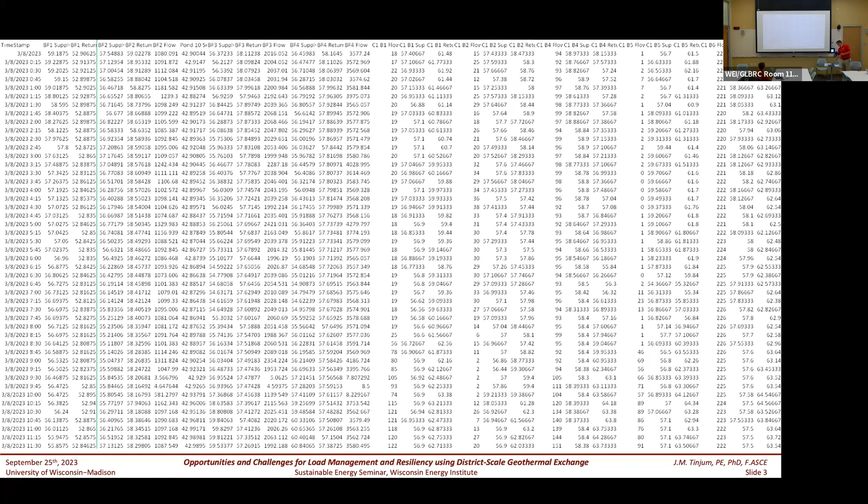So this is a little bit of a screenshot from energy data that I get daily from Epic Systems. Their flows to their different bore fields, through their heat pumps, their chillers, their energy usage. Epic Systems is a very gracious research partner, allowing myself and my students access to this information so we can poke and probe and look at it and calculate coefficients of performance and payback and environmental assessment.

Because when you can measure what you are speaking about and express it in numbers, you know something about it. That's Lord Kelvin. And I know sometimes our political system can measure things in different ways, but we as engineers and scientists are really expressing it in numbers, having hypotheses, testing those hypotheses, trying to remove the bias out of it and answering those questions. Just earlier this year, Madison City Council was looking for new rules for big buildings. So why did I put this here? So if we don't measure where we are in our energy consumption in our big buildings, how do we know where to go to?

So lots of pushback there from businesses and developers and similar, but one of those things that is gonna go to a quote from me in an article that was used to promote this. So this is Tinjum. The most logical application for geothermal heat exchange is in district heating and cooling systems, serving campuses, industrial parks, and neighborhoods. For example, a city could require or incentivize developers to put well fields into new subdivisions, allowing homeowners to tap into those energy savings.

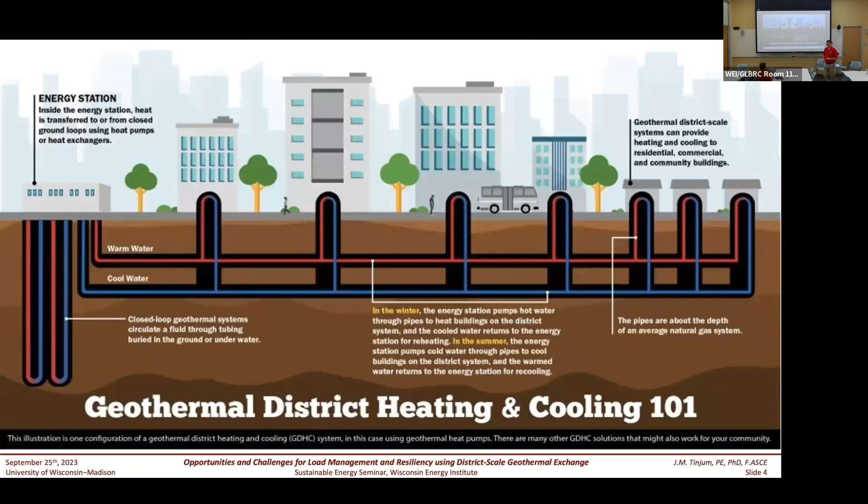So instead of every one of these individuals investing in their own geothermal exchange system, we share that community resource and we put the heat pumps and the chillers in the individual buildings, but we're using a common high efficiency geothermal exchange field. Maybe that geothermal exchange field is in a city park with soccer fields on top of it, or a common area, whatever the case may be, where we have that space to put these large systems that we're going to be talking about.

All right, so let's talk about scale. I like geothermal in that it scales very well, very unlike wind energy that I've also been working with for a decade plus. But wind energy just does not scale well to the residential scale. You're not going to have wind at your house unless you're just an enthusiast and want to lose money. Wind energy works best at large utility scale, 100 megawatt and above. It's where it has its efficiencies. Not so in geothermal. Well, yes, there's still efficiencies of scale, but it's not as pronounced.

So let's look at residential scale first. Typically, your capacity is 2 to 8 tons, less than 10 geothermal exchange wells. Cost typically well under $50,000, and say about $75 plus per meter of installed geothermal exchange well, with a coefficient of performance of 4 to 6. So first, let me define coefficient of performance. It means that for every 1 unit of electrical energy that I put into the system, I get 4 to 6 units of heat or cooling energy out of it. So yes, geothermal exchange uses electricity, and electricity's got to be generated somewhere, but you get 4 to 6 units of energy out of it.

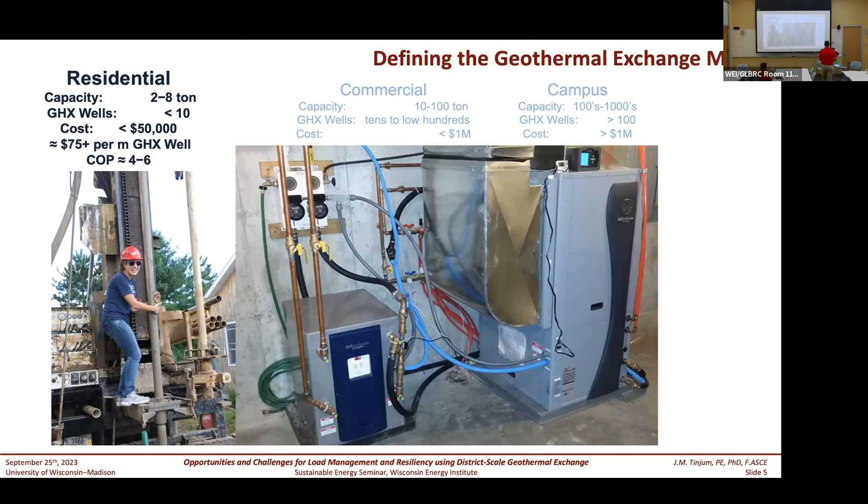So let's just compare a coefficient of performance of 5 to your natural gas furnace. The highest efficiency possible for your natural gas furnace is 1. You burn 1 unit of chemical energy and that goes into heat. The highest possible you can get out of something that's burning something is 1. So we're multiple times more efficient than burning a fossil fuel. On the cooling side, we're about twice as efficient as a traditional air conditioning system, whether it's cooling towers or some other type of system. That's going to matter later in how we think about this for energy resiliency.

All right, so let's start with that residential, and this is the heating cycle. My general rule of thumb in this area is about 60 to 70 meter deep wells. Every 60 to 70 meter deep well will give you about 1 ton of capacity. A typical residence in Madison has probably a 3 or 4 ton system. So a typical residence might need 3 or 4 60 to 70 meter deep wells to provide the heating and cooling in their house. We are looking for a delta of about 3 to 5 degrees Celsius.

So what that means is in the winter, I'm putting cooler fluid into the ground, and the earth is being used as a thermal battery to warm up the water in that pipe and bring it back about 3 to 5 degrees warmer than when I put it in. That's our energy exchange. So that's our power: moving mass, which is our water, times the C sub P, or the storage term of water, times T out minus T in. That's our thermal power. That's actually the definition for thermal power.

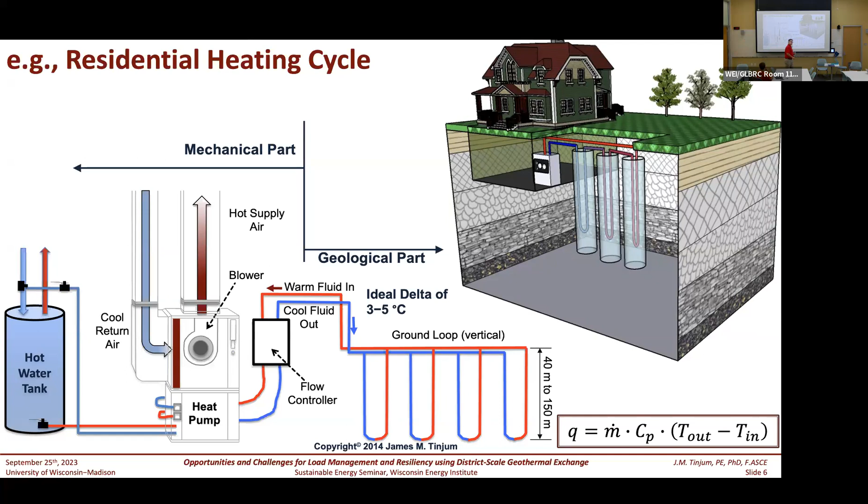Hey, this is not rocket science. No, we don't have to send somebody to the moon. This is doable, and we've been doing this. All right? This is some mechanical engineering, some geoengineering, but very, very doable, and has some limitations. We'll talk about that. But now let's go to commercial scale.

Say 10 to 100 tons of capacity. Maybe we got tens to low hundreds of geothermal exchange wells. Where our scale is going to get us is here. Usually we're going to get a better drilling price from those contractors because they're there for days and days drilling. So this is where the scale matters: the geothermal drillers can give you the best prices because they don't have to mobilize here, and the next day they're over here, and the next day they're over here.

So this is an example of the system at Badger Rock Charter School here in Madison, just south of the Beltline. So Badger Rock Community School, they have geothermal heat exchange at their system, and they have 72 wells, 300 foot deep, and that is used for Badger Rock as an example of a commercial or building scale on geothermal exchange. A little bit bigger pumps for that system.

So you see the, can't count all of them, looks like 4 pumps, but you always have at least 1 pump and the second pump for backup. So then the scale also is we can more efficiently pump our loop. We get higher efficiencies out of bigger pumps and variable speed pumps and similar. So that's the commercial scale.

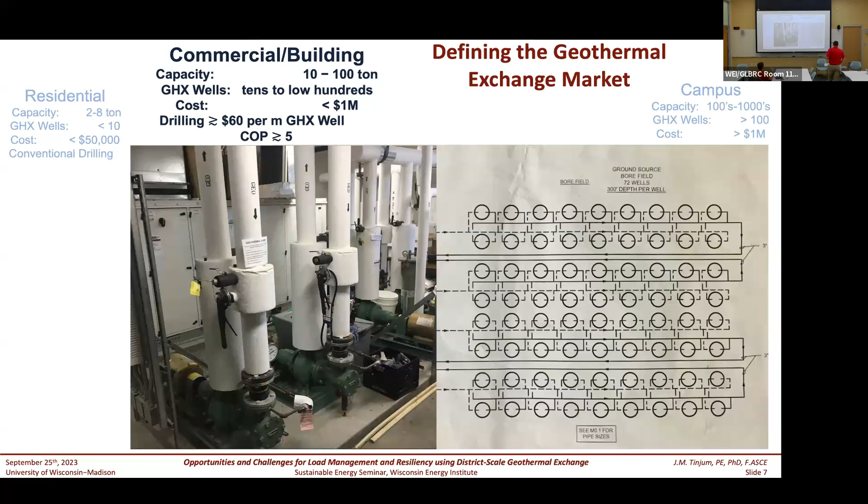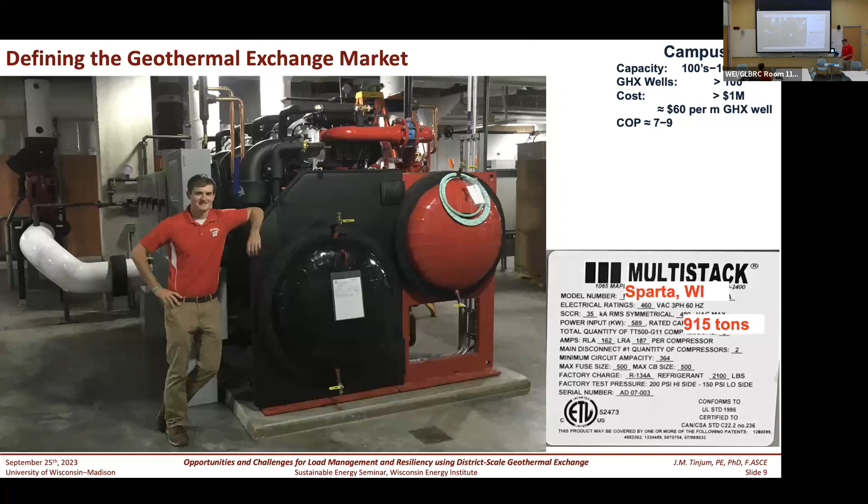All right, so just a little test or quiz. I think Alicia's seen this before. So, are all watts created equal? So Scott can monitor the online crowd, but who would put a check next to JJ? JJ, who's the favorite? Oh, we might have a winner. We got 2, 3, 4, 5, 6, 7, 8.

All right. How about Derek, the little brother, fullback? Yeah, nobody loves the fullbacks. All right. How about League Defensive Player of the Year, Pittsburgh Steelers, TJ? Anybody got TJ as their favorite Watt? All right, well, JJ, apparently, big brother, is taking it away. But I do have a point to this, okay? My point is,

now let's go to power. What's your favorite watt? Thermal, radiant, electric, or chemical? It's a rhetorical question. If you were in my sustainable energy course, we'd take a vote on this. But I can guarantee you that a watt is a watt is a watt is a watt.

There's the same amount of energy in a thermal watt as there is in an electrical watt, but it's what we determine to be useful for us. Heating and cooling, that's useful energy. Electricity to run this projector, that's useful energy. Chemical energy in a battery, that can be useful. So a watt is a watt is a watt is a watt.

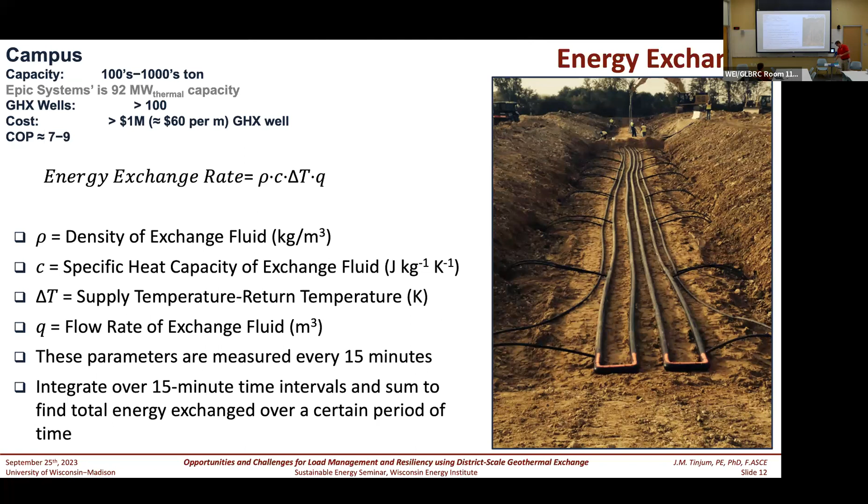So this is a circuit. Typically, there's about a dozen to 15 wells on one circuit. There's another circuit. These wells are about 6 to 7 meters apart, 152 meters deep. And we just have lots of circuits at a big site. But generally speaking, commercial scale, EPIC scale, we're just doing these circuits of water. It's not complex. Have a bigger pipe going to a slightly smaller pipe, going to a slightly smaller pipe, and that's moving the water through the system. The smallest pipes in our system are the vertical columns. And we've got about 36 to 42-inch headers out there bringing this home.

All right, so EPIC Systems. I stole this from Google Earth, and they've probably built like 5 buildings since. Medical software company, a dominant position in the US market, European market, and elsewhere. 10,000 employees, a campus that we've all heard about. The entire campus heating, cooling, domestic hot water is all from geothermal exchange. There's no backup systems there. They got some spare heaters, I think in their auditorium, but that's it. Also, they have some snow melt operations from some excess heat.

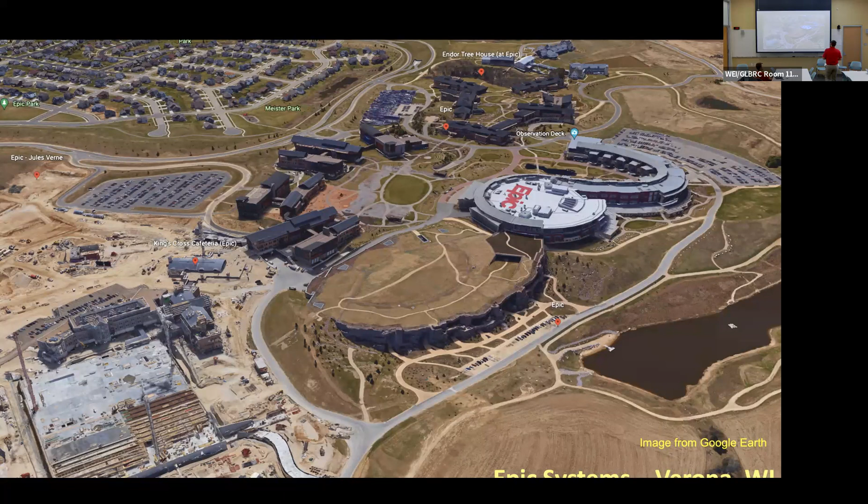So if we can do this for a 10,000 person campus, we can do this for universities, definitely for high schools, middle schools, corporate campuses, the Amazons of the world. This is very doable if we can do it here at EPIC Systems. All right, so

I was introduced to EPIC in 2009 by a colleague of mine. Her husband works at EPIC, and she goes, did you know that EPIC is using like this geo something for their heating and cooling? And I go, no. Hey, can you get me a tour? So she talked to her husband, who connected with the facility manager at the time, Bob Brandherm. He goes, nobody asked to come out and see this. You're the first one. He showed me the system and I go, this is awesome. Why doesn't anybody know about this? His quote was from the owner of EPIC: we do things because it's the right thing to do. And it's evolving a little bit.

So I then got invited to have a large research collaboration on their largest geothermal exchange field. It's 2,596 borings. I know because I sent Alicia out there to count them. No, just kidding. That's what it says on the design sheet. But we've been running this for over 8 years, tracking every watt into and out of that system and the energy it takes to run it. Those 4 geothermal exchange fields, GHX, Geothermal Heat Exchange, 48.5 megawatts of thermal capacity. If you add the heat sink pond and the deep quarry lake, it's 92 megawatts. So that's a large system, actually the largest system.

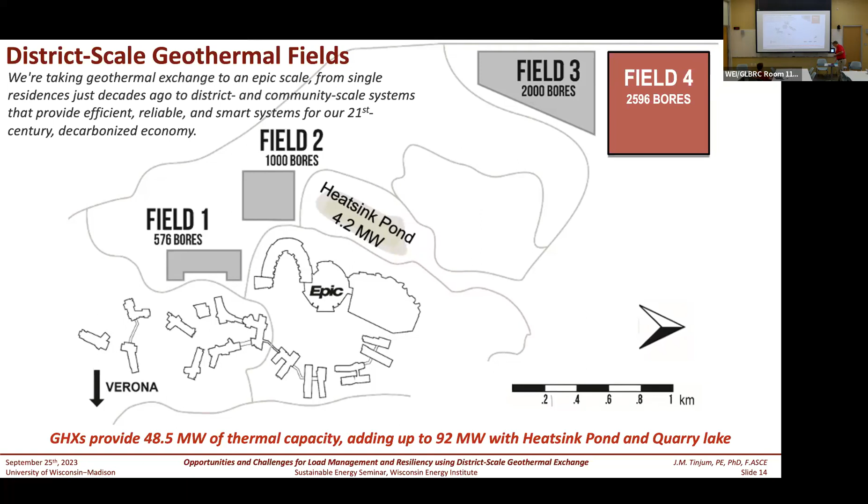This is what that field looks like. So here's the geo side of it. We're going through the Prairie du Chien group. It's crap rock, that's what the geologists and the drillers call it. It's got karst in it, and the drillers don't like it. Going into the Jordan Formation, a beautiful quartz sandstone. St. Lawrence Dolomite, Tunnel City Group, Wonewoc Formation, and into the Eau Claire shale. So a really nice test bed of a sedimentary basin where we can track heat flows.

And the beautiful thing for us as researchers is every one of these formations has different thermal properties. So it makes it really cool to try to figure out where all that heat is going across very dissimilar geological media. And the other thing why geoscience and geological engineering is so hard is because we work with geologic porous media. So porous media, variably voided. Voids sometimes are filled with air, sometimes with water. So it can be challenging.

I've got test wells here, 1, 2, 3, 4, 5, 6, 7, 8, 9, 10. Got 11 wells out there where we're monitoring temperature development. And we're putting in a couple more down here, I believe, in the spring. And EPIC will be expanding in a new field at some point in the future as their campus keeps growing.

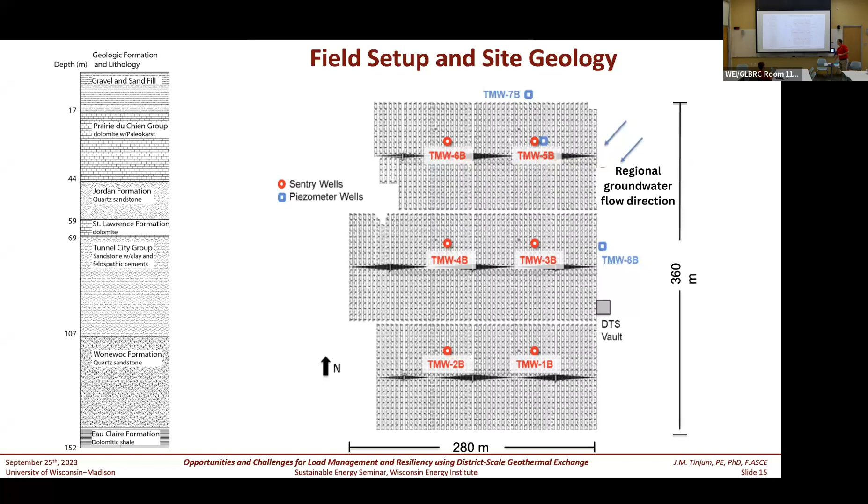All right, so let's look at that. So from 2015 through September of last year, we've been tracking how much energy has been exchanged in just field 4. So just that one field, not the entire system. But we could do that if we want, but little baby steps first, stick with one field.

So terajoules, yeah, shoot, tera. Is that to the 15th or the 12th? I can't remember. For scientists and engineers, it's 12, tera, then 15 is peta, okay. Yeah. It's a whole lot of energy. A terajoule. Joule is this little tiny, inconvenient unit, but

we had terajoules. So they had excess heat the very first year. They were mostly dumping heat into it, also into the second year. And you'll see that if you're scientifically oriented, you just go, wait a minute, we're putting a lot more heat into the field than we're taking out. And that's the case, because even in Wisconsin, most commercial facilities are cooling dominant.

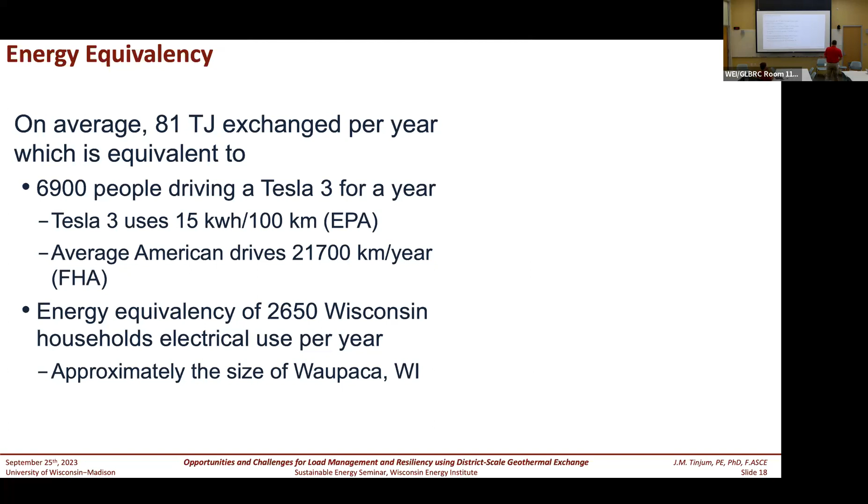All right, so the average was 81 terajoules in a year for just field 4, just that one field. That is equivalent to 6,900 people driving a Tesla 3 for a year. Same thing, energy equivalency of 2,650 households, their electrical use. So running this field is the same amount of energy as all the residents in a small or medium-sized town such as Waupaca. That's the scale of how much energy exchange is occurring.

Oh, there's Waupaca. I did this out at Stanford earlier this year. So we had to show them where Wisconsin was and definitely had to show them where Waupaca was. We usually go every year to the Stanford Geothermal Conference in February, because who doesn't want to leave Wisconsin in February and go to California?

All right, so a couple of things where we have a very rich data set.

We use fiber optics, so all of those 11 wells that are out there, we've got fiber optics down the hole. So, Tinjum, why in the world would you put fiber optics down a geothermal exchange sentry well? Well, it turns out that when I shine a light or laser through that fiber optic, it interacts with little imperfections in that fiber optic crystalline structure. And some of that light energy will come back. We know the speed of light. So I'm measuring these signals bouncing back, and I know exactly where that scattering event happened.

Okay, well, that's cool. You know where all the imperfections are. But even cooler is we use the ratio of the waves, the scattering event, which are perfectly correlated to temperature at the point of correlation. So what this means is I've got temperature from basically every meter of fiber optics, and I do it about every 20 minutes for 8 years. Well, except when it was down during COVID. But anyway, what we call this is distributed temperature sensing. So with the 11 wells and this 1 meter sensitivity, I get a 3-dimensional view of where the heat is, or what the temperature is in the field.

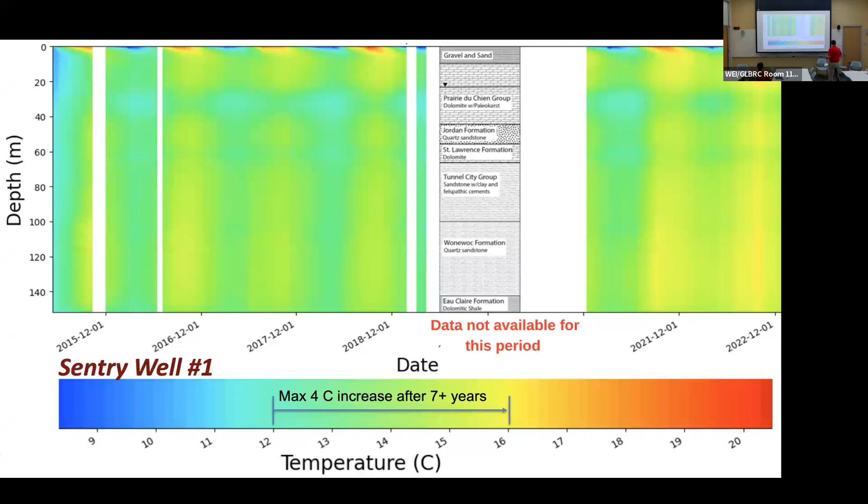One of the hypotheses was, is there going to be arsenic release if you overheat the field? We actually did a research study with the DNR and said no. Where we're operating, it's not even close to significant enough temperatures to get an arsenic release because of enhanced chemical reactions at higher temperatures. So, not with rocks. If it was like a clay soil, there could be some consolidation thermally impacted, but not at 4 degrees Celsius. I don't want to say it's incidental to the field, but it's pretty close. But irrespective, you want to keep it sustainable for the long term.

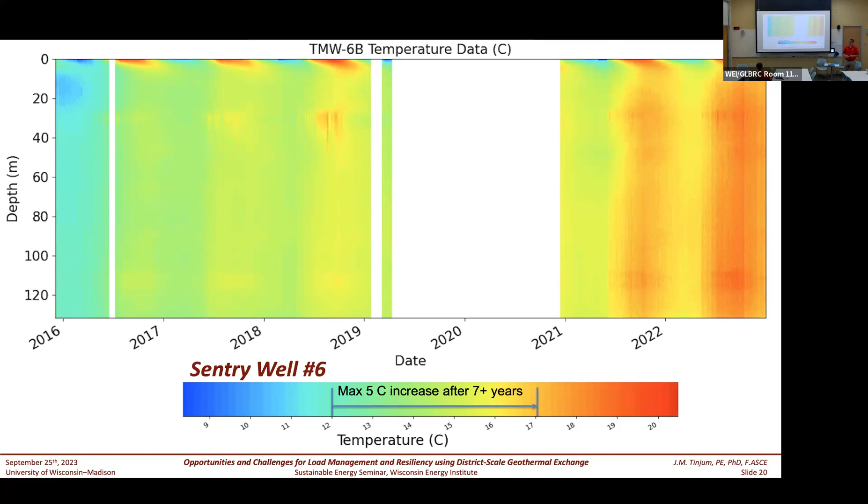Different well, a little bit different. We had about a 5 Celsius maximum increase. And you see a few other things, that it is seasonal. It heats up in the summer, end of summer, cools down a little bit, heats up again. And this is pretty common for geothermal exchange systems worldwide. So are the fields heating up? Yes, a little bit. Another one of my graduate students is looking at the impacts of this to the coefficient of performance. We want to know how much the coefficient of performance has changed, because now we've got to push a little harder, push a little bit more water, a little bit hotter water, to get that same delta. So we're looking at that.

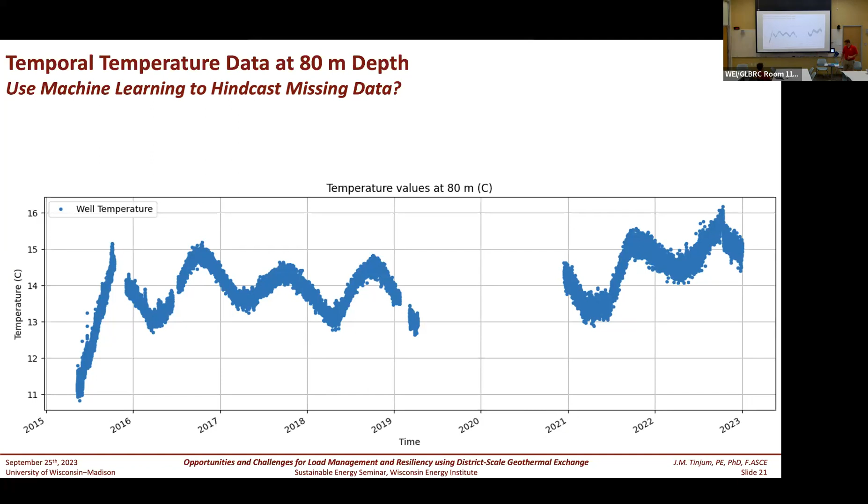And a brand new thing that we're doing, another graduate student, Shubham Atri, who is actually teaching 367 now for the campus. We're using machine learning. A lot of people across the country have said, hey, you've got great data, but so what? How are you going to use that? And so we're just on the ground level of using machine learning. As the start, we're looking to hindcast. So these were our challenging years when our interrogator shut down and then COVID happened and we couldn't fix it for 1.5 years. You hear about machine learning all the time. Maybe you've got projects on it. So what it means for us, my analogy is, how do you train your dragon? Or in our case, how to train your geothermal field.

So I have that rich data set, and this is just well temperature at one spot at one point in the field. So I've got like 10,000 of these graphs possible. And then I've got flow rate, and then I've got change in temperature. And then we've got electrical energy going into their campus centralized heating and cooling. And so what we want to do is train our dragon using existing data so we can predict what will happen in the future. So we're training our geothermal field, or our system. So I go, what if I delay putting in well field 5 for 5 years? What will happen? What if I put the well field in next year? What will happen?

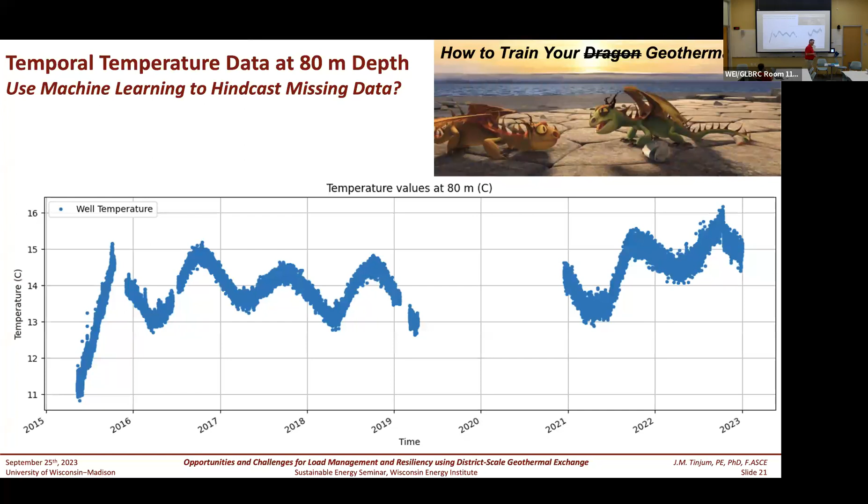What if I put more energy into field 4 versus 3? What will happen? So our goal with machine learning is to take this rich data set and then train our system to be as efficient as possible and do those what-if scenarios. So instead of just saying, let's put in another 2,000 wells and let's see how it goes, hopefully make some educated decisions about how these will impact the efficiency of our system.

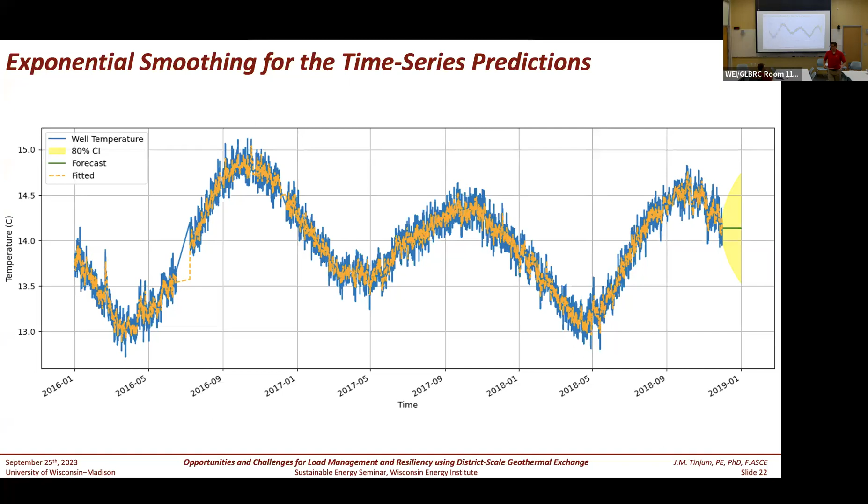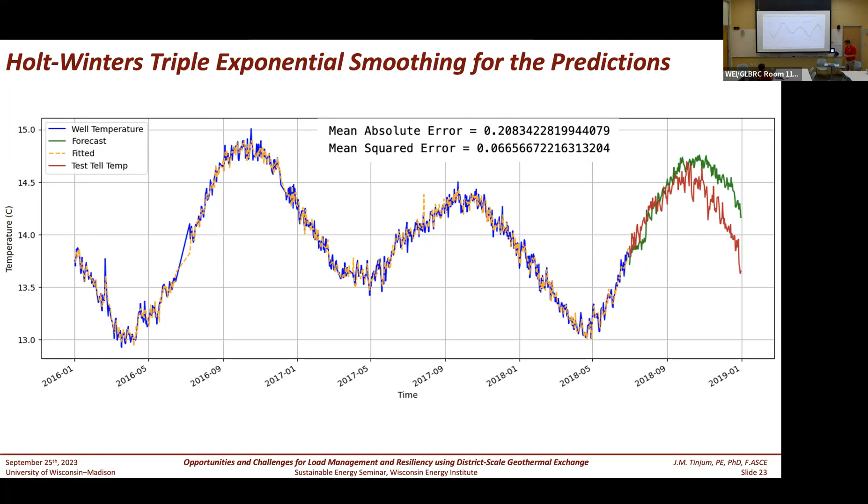Okay, so we've trained it pretty well. Pretty much anybody can do this. If they have data and they spend enough time, you can recreate it, but that's what you have to do. You've got to train your system against your data. And then we are using Holt-Winters triple exponential smoothing for the prediction. And just because it sounds cool, Holt-Winters triple exponential smoothing. And we have an abstract accepted on this, where we're basically minimizing our error. And remember I said we've only been doing this for a couple of months.

So then we did our hindcast, and we said, okay, we take all of that data. We have the ambient temperature, flow rates, and similar. I just don't have the field. And this was what we would have predicted. Okay, looks good. We're a little bit off, so we're still working on it. We're working on just huge amounts of data. So once we nail down this hindcast, then I can change my parameters over here and say, okay, what if we do this? I'm much more confident that we'll predict what will happen to the field using machine learning.

Yes, sir. You said that you were using the real flow data or just the real ambient data? We're using everything. So I'm using meteorological data for Verona: temperature, precipitation, wind speed, humidity, because I don't know what is important or not. And then I'm also using flow rate to the field, temperature into the field, and temperature out of the field. Probably a few other things.

Do you have a question, sir, or just stretching? Okay. Yeah.

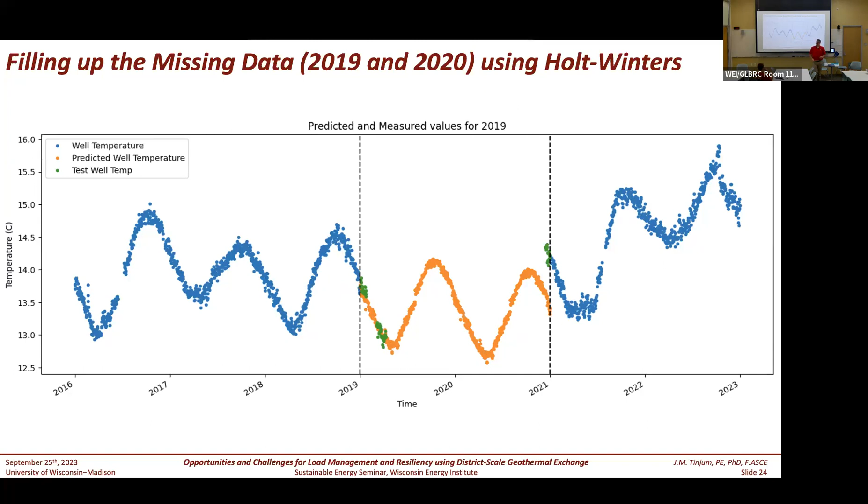So I've got that data. And in this case, we're just training it for the field temperature. But in the future, we can train it to predict change in temperature going in and out, which impacts the performance of our chillers and our heat exchangers. So we're working with a colleague at St. Louis University that's an expert on this. I said we're only a couple months into it, but that's where we're trying to take this data, to do the what-ifs.

What do I got? About 10 minutes left? Okay.

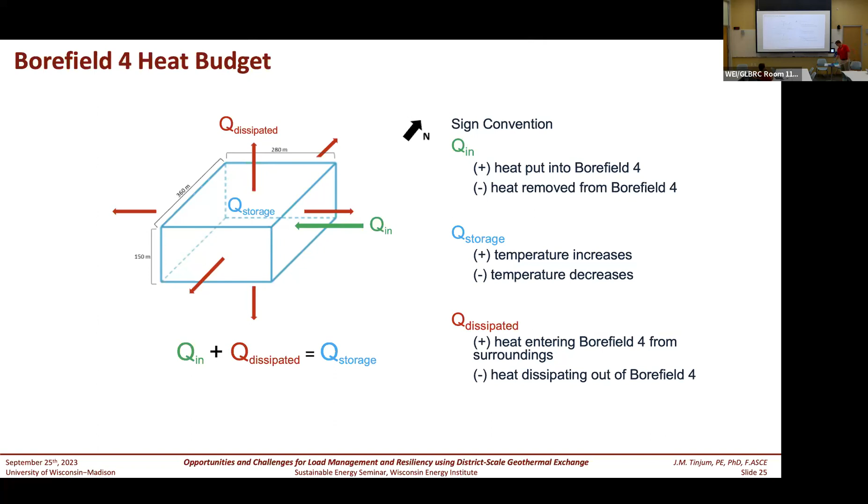All right, so the other thing is we have excess heat. I know that we're putting excess heat into the field. Where is it going? So a simple heat balance: I know how much heat is going into the field because I'm measuring the flow rate in, the T in, and the T out, and I have all the temperature in that three-dimensional box. So this is the heat going into the field, cumulative, and it has that winter, summer pattern. But you see that we have put in an excess of almost 400 terajoules of heat into that field that have gone somewhere.

The storage term, this is the field heating up. Okay, so I have that volume and it's increased 4 degrees Celsius. I know that's how much the change in heat of the field is. And then I know that approximately 200 terajoules has gone somewhere. And so that's one of Alicia's topics: has that gone laterally? Has it gone with the groundwater out of the field? Has it gone through the bottom of the field? Has it gone out through the vegetative cover? Has it been lost to the atmosphere this way?

That's where we're going next. I know how much energy has disappeared; now we're trying to figure out where it went. We are putting some wells next spring down gradient to help us with that. And then Alicia is doing COMSOL modeling, using analytical predictions in a COMSOL model to figure out where that heat is going, because that will help us design fields in the future if we know what the heat balance is and where that heat goes or where it stays. So that's another project that we've got.

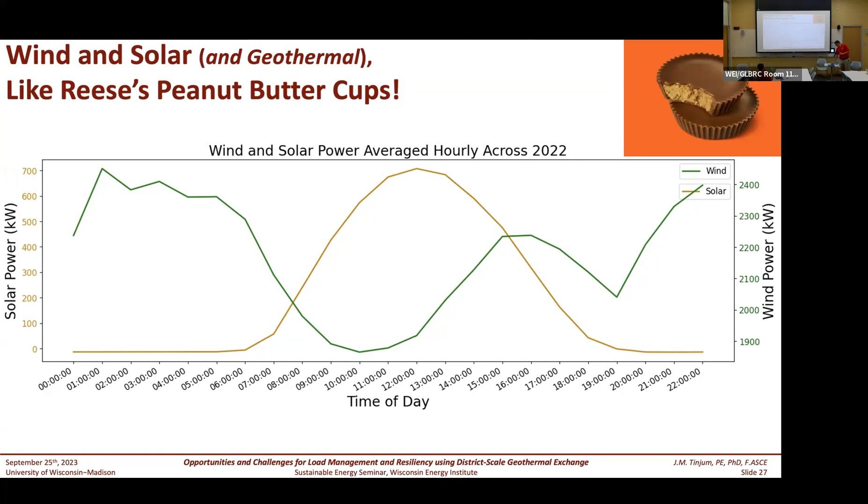So how do I explain that to my family? Well, I use Reese's peanut butter cups. Okay. So chocolate, say wind, that's good. I like chocolate. The peanut butter, maybe the solar, I like that. You put them together, now you got something. Now you got something. So I think wind and solar and geothermal can be very complementary flavors.

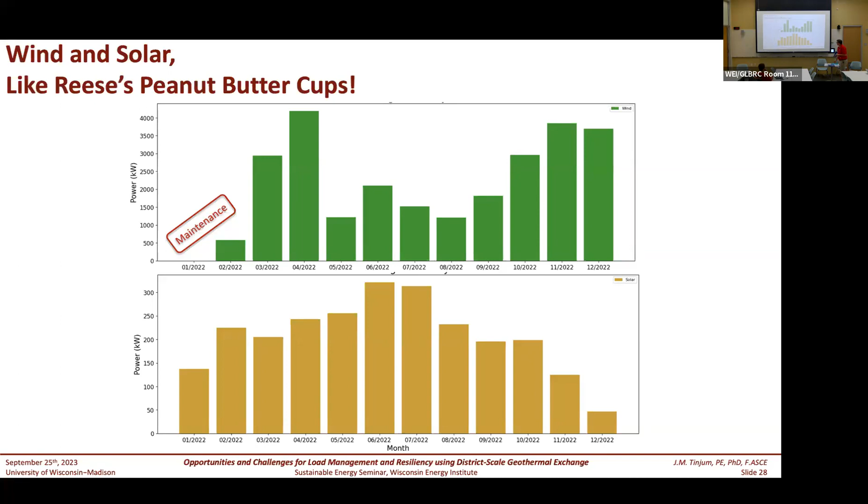So then this is just month over month. That's the other thing is in the summer, the wind energy is worse in August, and it's peaking in June and July for the solar. So also very complementary month over month, wind and solar. Okay. Again, Reese's peanut butter cups.

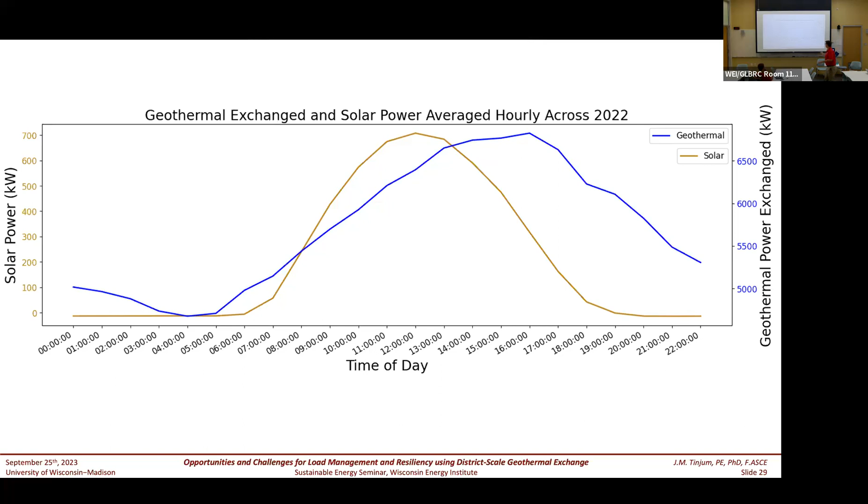Now, my vision and what they're thinking of at Princeton is now let's put geothermal exchange in there. I don't know if this is the entire site or field 4, but when solar is most pronounced, that's also where we're using the most geothermal. Remember I said that geothermal exchange is about 50% or twice as efficient as a normal system. So if I didn't have geothermal exchange, I would be using twice as much electricity for that cooling. I'm using less, and it's also time coincident to the solar when I need that extra energy.

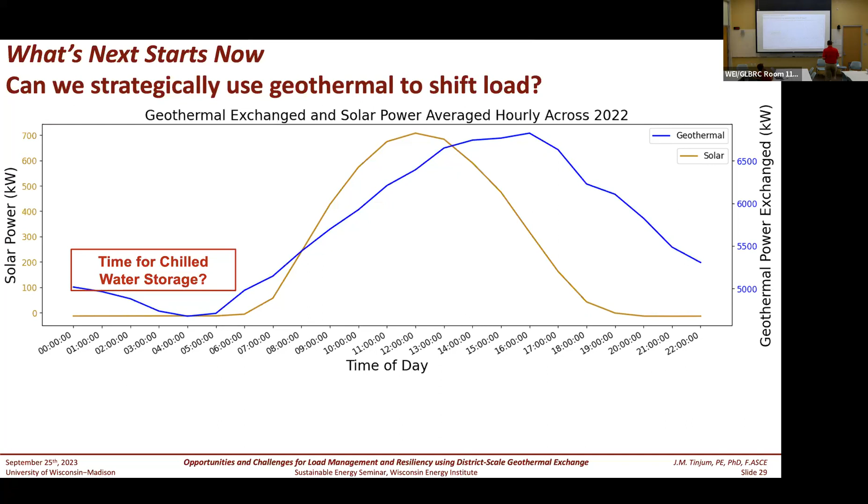Their peak is in the winter, typically when electricity is much more available, because all the power plants are more efficient in the winter, as an example, and we don't have all of those cooling systems. So just some food for thought that we're flipping the script on energy resiliency and where our peak loads are. So yeah, can we use geothermal to shift load? Absolutely, we're doing it already.

Natural gas, so just instead of burning natural gas, we're using electricity. We're using more electricity in the winter, but we're using more electricity in the winter because it is more highly available and it's cheaper in the winter. Your power plants, we build more power plants for summer peak load, not for winter peak load. All right, just I think 2 or 3 slides left.

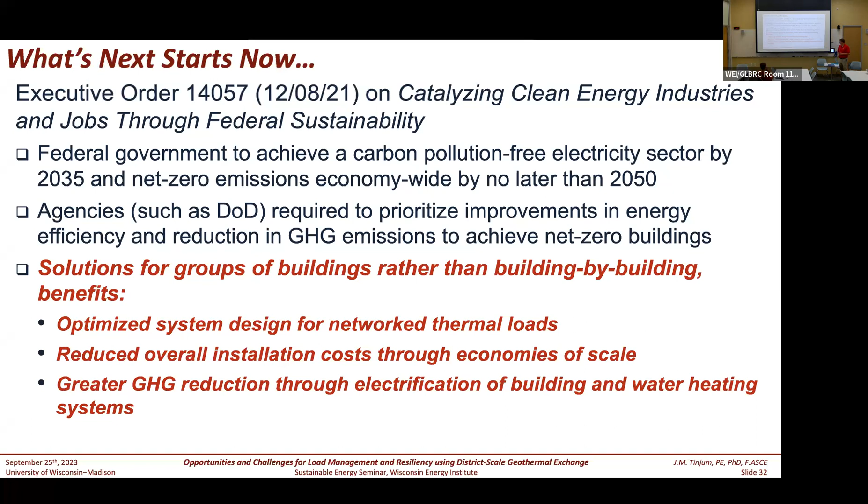What's next starts now. We have a favorable federal government by executive order looking to catalyze clean energy industries with federal sustainability, especially solutions for groups of buildings versus building by building. As an example, I'm working with the Department of Defense. They own 300,000 buildings across 500 installations. 33% of the Department of Defense energy use is for heating and cooling these buildings.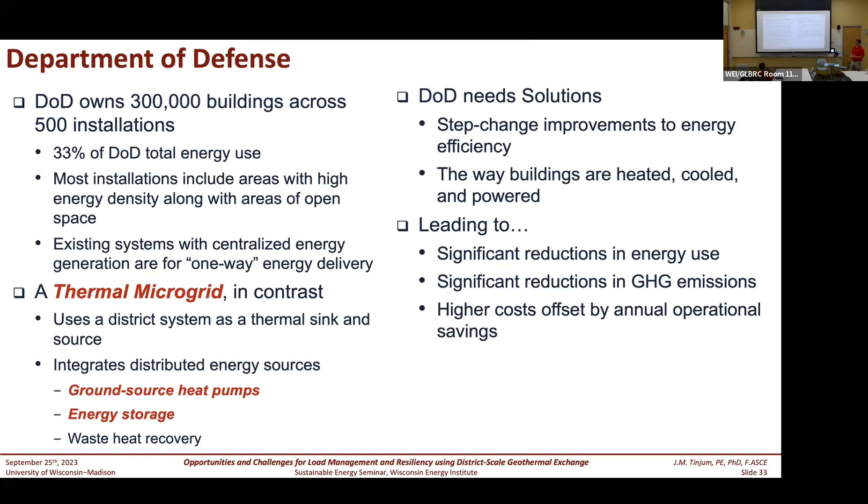And so if we can be more resilient, more energy efficient on purpose for a large institution such as the Department of Defense, we're looking at thermal microgrids that integrate energy storage, ground source heat pumps, ultimately leading to significant reductions in energy, significant reductions in greenhouse gas, and the higher upfront costs are offset by annual operational savings.

At the Ford Blue Oval campus outside of Memphis, Tennessee, we proposed a fiber optic system to monitor their cooling-only system over top of a large aquifer. We have funding from Oak Ridge National Lab. We're just waiting for Ford to sign off on it so that we can go put our system in, paid for by one of our national labs.

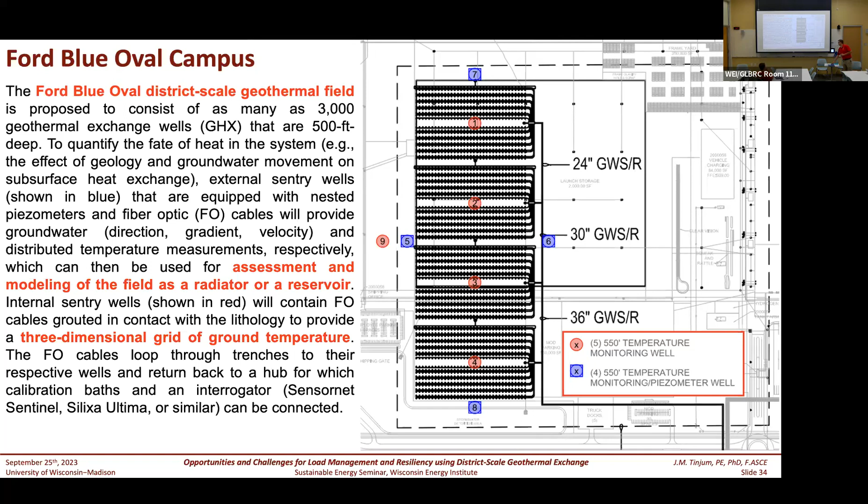Princeton has a university-wide policy to be carbon dioxide neutral by 2046. How are they going to do it? Geothermal exchange. That and chilled water is how they're going to meet their mandate to be CO2 neutral by 2046.

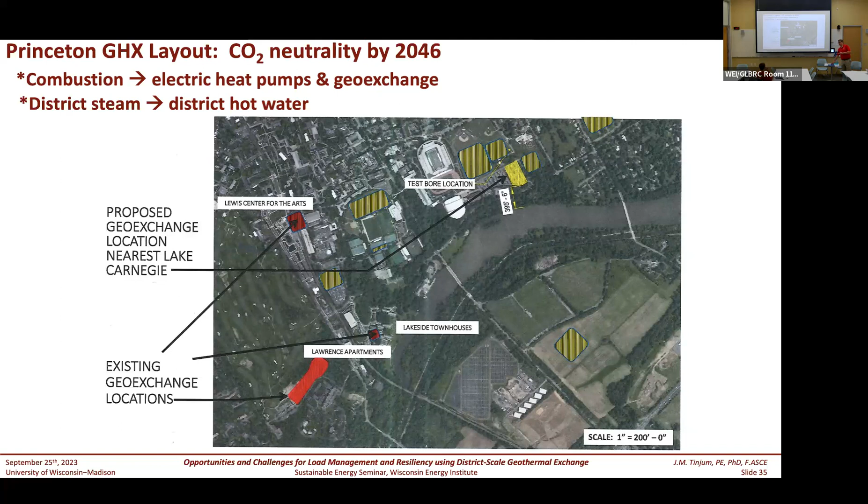And finally, one of my projects at Appleton International Airport: can we use places like the airport to do community geothermal, where we then meter this out to your tenants at the airport site, such as FedEx, Bombardier, or similar? Again, this would be a community scale system. The airport would own it, and then they would act as, I will give you hot water or warmer water.

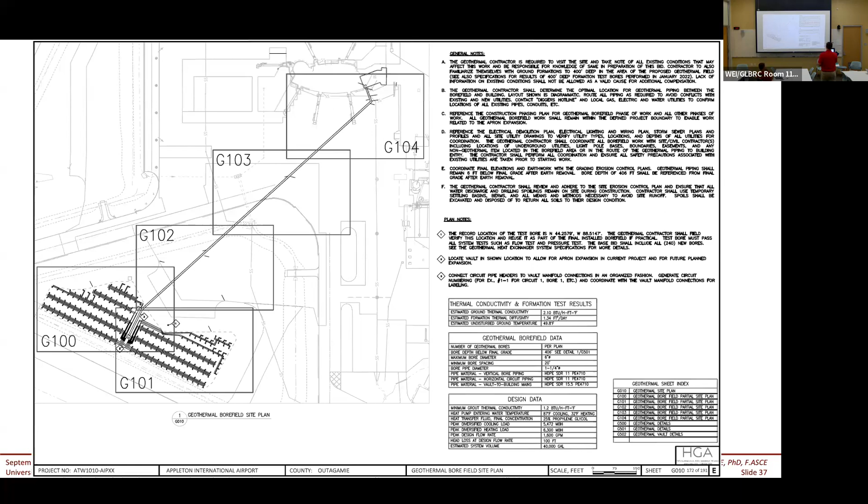You put in your heat pump, and we'll use this community system that I will invest in, I will install, and we'll have to figure out how that payment happens and things like that. But those are some of the things that we're working on here in Wisconsin. Lots of thanks. Lots of companies have put in time, materials, and drilled the wells for us. Lots of graduate students.